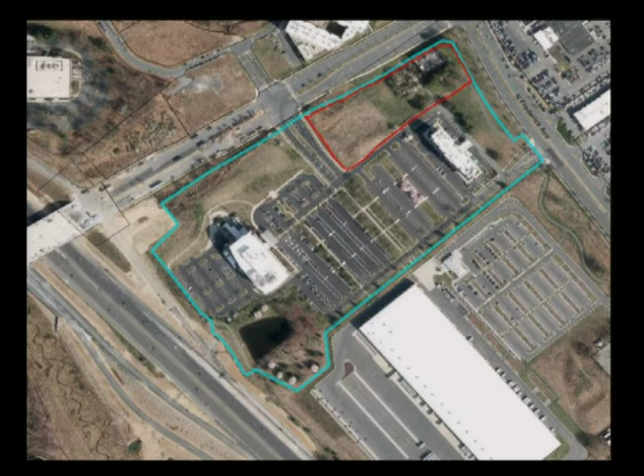Good evening, all, let's jump in. Good evening, Commissioners. Staff is before you to present final site plan application SP-9199-2022. This application was based on the concept preliminary site plan SP-07008, which was approved on October 20th, 2010, and approved the overall proposal for the Monument Office Park. This application represents the third of a four-phase project, the fourth phase being the second Kaiser Permanente office building shown on the concept plan. As shown on the screen, the office building is located at 735 Watkins Mill Road. The property is accessible from Watkins Mill Road and Maryland Route 355, North Frederick Avenue. This application comes before Planning Commission in accordance with Section 24-168, which requires the Planning Commission to grant final site plan approval.

The applicant is requesting approval to construct a 142,600 square foot, four-story life sciences office building. The applicant is also requesting approval for amendment to Final Forest Conservation Plan ENV-9201-2022, pursuant to Chapter 22 of the City Code.

Here to start the presentation on behalf of the applicant is their attorney, Mr. Jody Klein. Chris, I have to tell you, I'm going to apologize. My script, I was introduced to staff, and I didn't - I just sort of flipped right through that. I apologize. Thanks for being here, and thanks for introducing the application.

Good evening, Mr. Klein. Good evening. Thank you. For the record, my name is Jody Klein. I'm an attorney with the law firm of Miller, Miller & Canby with offices at 200B Monroe Street. And I cannot tell you how happy I am to be in a hearing with live people face to face instead of having to talk to you over a computer screen. Just so much better, I think, better dialogue going on between us when we do that.

My role is kind of limited, the attorney Jody always has. You can see us when we roll our eyes. Yeah, right, yeah, the body English is much more obvious when you sit. No hiding that now. Yeah, that's exactly right. No, I sure - but nobody really wants to hear from the attorney on this stuff because you want to get into the building. That's what really kind of is important, how it sits on the land.

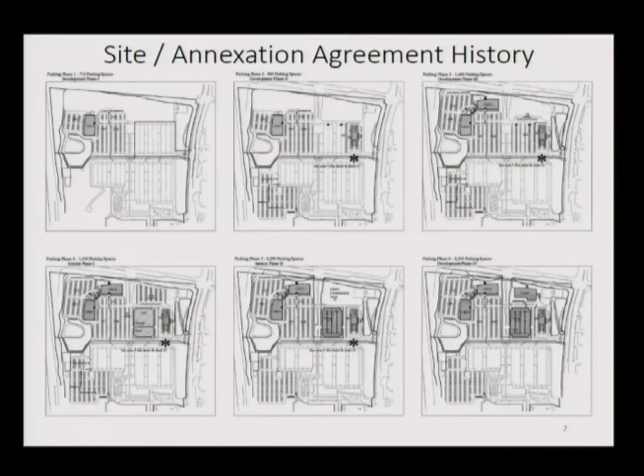Of relevance there is that when OB2, Kaiser Permanente 2, and OB3 Monument both get built, there would have been enough demand for parking that we would have had to build a parking structure. So that shows you the envisioned sequence or evolution of the project.

Could I have the next exhibit, please?

This is also one of the exhibits generated to show you what's going on, and it basically shows what's in the field today with the Kaiser Permanente building and the hotel there, and our project in the upper right-hand corner, which you'll hear a lot more about in a minute or two.

The next exhibit, the only difference from the previous one, is the footprint of the building that was actually approved for that property, so you know what was originally approved and can contrast that with what you're going to see today.

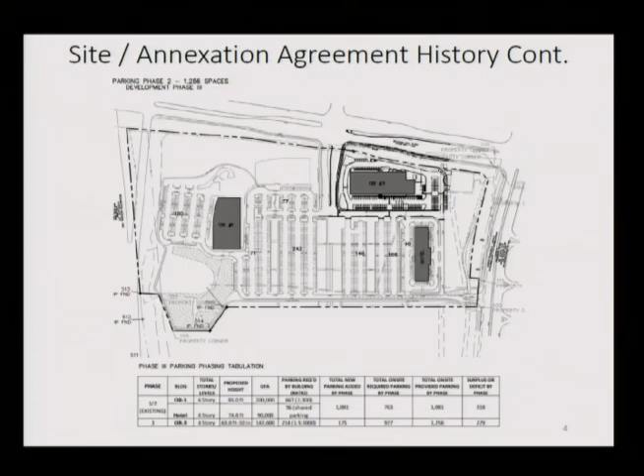That was a 260,000 square foot office building, 8 floors, about 110 feet tall, 867 parking spaces, to be located 48 feet from Watkins Mill Road after dedication was ultimately going to occur.

The third exhibit basically shows what would happen when OB2, the Kaiser Permanente building, gets built. The reason the staff wanted us to stress this is that they've insisted throughout the review process that we always demonstrate enough parking to satisfy our building, and that there's always enough available to satisfy any other users to build in the community, in particular Kaiser Permanente.

This matters because it's a condominium regime, and each condominium unit is the footprint of the building. So there's some parking associated with each building, but most of the parking is in common element areas — basically a pool of available parking.

Kaiser Permanente obviously doesn't want, and your staff didn't want us to encroach at all on whatever parking they need. They have a pre-approval for 200,000 square feet and need 667 parking spaces.

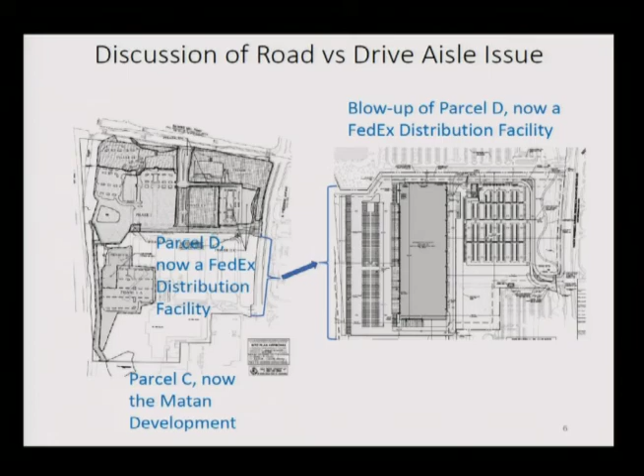It is true that when you approved the final site plan for FedEx, you did reserve a connection into the Monument Office Park, but it's undefined where that's going to be. Based on how their parking is laid out with hard curbs and drive lanes, it's not going to be an easy connection. I believe that was further compounded when the Matan plans came in—there's a connection between FedEx and Matan, but it's off to the side in a very unusual location. So the point is, there's no main thoroughfare from south to north. These two things don't really work together that well.

If you had a chance to look at the staff report, we had an agreement with staff that probably the evolution of development out here does not allow you to consummate the original planning principle, if there was one, to have a street running through all the communities. So that comes up only in the context of whether we can park cars at 90-degree angles, which will come up in our presentation.

With those two historical items and overview, I'm glad to answer any questions, but I think you'd like to hear from Dana Clark, who's going to tell you how the building is located and oriented, and then Jeff's going to tell you how it's going to look. Do you have any questions of me? No? Okay, thank you very much.

Not for now, Dave. Dana? Do you want to do that from here, down there, or wherever you want? Wherever you'd like to do it. All right, but take your minute.

Thank you. Good evening, I'm Dana Clark with Clark Azar & Associates, the civil engineer on the project. Pursuant to Jody's description of the history of the project, this is an overview of the overall site and where our project sits, in the upper right quadrant, OB3. OB2 is not built yet, but the hotel and the Kaiser building are.

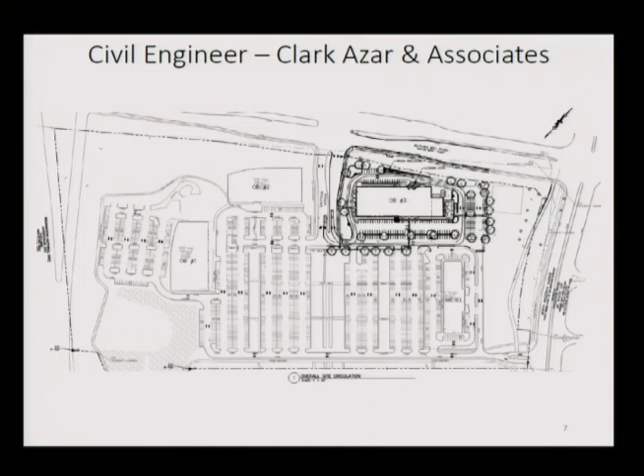So this is our colored-up blow-up of our site. After entering off Spectrum Avenue, we have two access points directly off of Spectrum and then farther to the east. We've provided 175 parking spaces on our site, taking the remainder of our 214 required from the bulk overview parking spaces for the development. We provided site circulation for WB50 trucks and any other possible delivery vehicles, as well as fire trucks, all the way around the site.

We've also provided fairly extensive access paths for pedestrians around the development, as we're removing one sidewalk that currently exists on the north side of our drive aisle. So we're providing another sidewalk on the hotel side of our main drive, the street Jody was previously referring to, as well as a connection around our site from the hotel, near the substation, and then access directly to Spectrum.

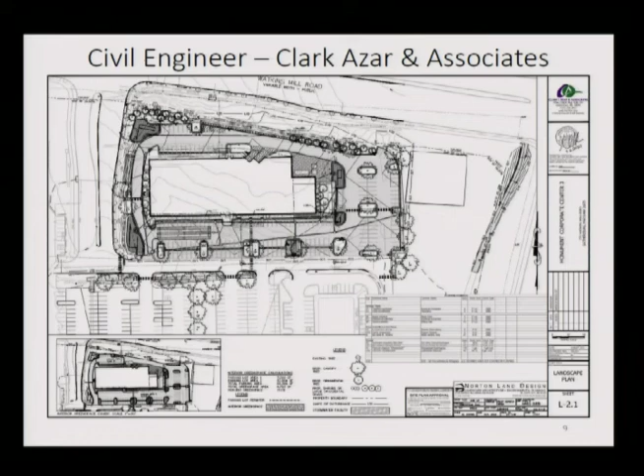This is just a closer view of the landscaping plan and how those requirements are being met, and the breakdown of all the trees, shrubs, screening, etc. I think Jeff is going to go into the building unless there are any questions on the site.

Let me ask you, if you put up the plan that showed the extension of the asphalt path on the linear park, just for quick illustrative purposes, give me a before and after on how cars got and will get to the hotel, and how pedestrians using the linear park trail would get to this building.

Cars currently get to the hotel via the access on Spectrum Drive, similarly to everyone else, so we're not impacting that. Right now it's a drive aisle that feels like a road, or at least a kind of reserved drive aisle that gets them to the hotel. It's not going through a parking lot, it's a trail, not a road. It's an asphalt paved trail, but it's not intended for vehicular access.

No, I'm talking about the vehicular path in for the hotel. Yes, you're in a car, right? You drive in Spectrum, turn left, and the drive aisle that takes you to the hotel is a dedicated, at least it feels like it now, kind of dedicated drive aisle. Moving forward, it will appear to cut through the parking field for the new building, right?

Yes, because you've somewhat got parking heading in off of it. There's no continuous aisle or anything like that, it sort of becomes a parking lot. Correct. All right, so that condition, the hotel folks are all aware of that, they understand the wayfinding, all of that's been discussed, right?

Can I add a little context? I'm Ryan Kim, I'm with Monument Realty, the development manager on this project. So the hotel actually has its front door on North Frederick Avenue, and there's a North Frederick Avenue address. There actually is an access point directly off of North Frederick Avenue. So I would imagine that most people putting that into their GPS are being pulled onto 355 and entering that way.

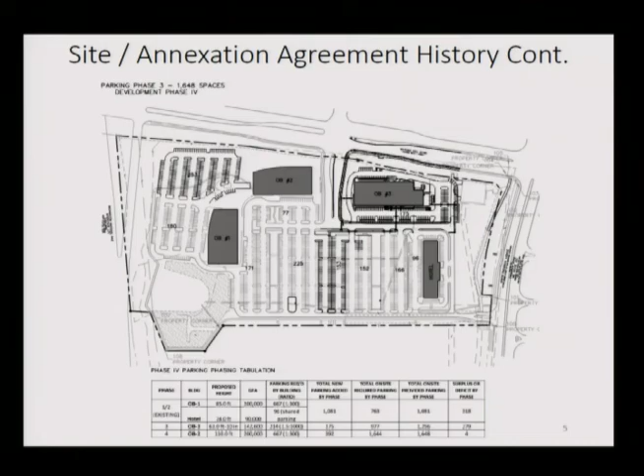So we like the way it's set up. We like the location at the north end of Gaithersburg because it means people can get in and out with a lot less traffic than at the lower two exits. So we think it's going to be attractive to tenants from that perspective.

Talking just briefly about the site plan itself. There's a lot of green to the north of this project, but the majority of that is right of way, so we do not control it. There is, as mentioned before, the old IBM substation to our east. The building is sitting on the site, which is a relatively densely developed suburban site.

The things that are unique to a life science building that are important to tenants looking at the building: obviously they want a good front door, a good front door image, that's important to them. Good loading docks and good loading is important. They have large trucks, and it's not just once or twice for move-in, it is continuous. They have stuff coming in on tractor trailers, on pallet trucks. So loading is a very important aspect.

Also, a lot of the major tenants will have other, quote, junk - it could be transformers, storage tanks, nitrogen tanks. There's a lot of stuff that life science tenants need to have. We've tried to create a service yard to the northeast corner of our building to accommodate a lot of that. Our base building generator and transformers are in that service yard, and it's our intention that the remaining space be kept available for tenant equipment that might come in. We have no idea what it is - we're just guessing that it's going to happen because it tends to happen on almost all projects.

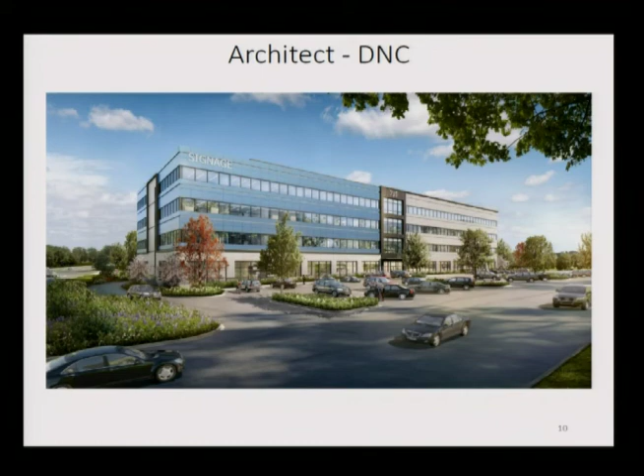As a spec lab building, some aspects of it look like a good spec office building. There are certain differences - from a good office building standpoint, we work with long span structure, so we basically have 40 feet from the skin of the building to the interior columns, making it very flexible for what happens on the inside. The cross bay spacing is 22 feet on center, which is different than an office building, because that works in a lab harmonic.

This building, when we get to the typical floor, you'll see it's a 3-stair building, so we can end up having quarter floor tenants without having to run a corridor back and forth. As I said, we gave priority to bringing the loading directly into the building - the intention was to marry the loading up against the rear service entrance rather than letting it come in on the east end, because we did not want to break it into a predefined small tenant suite over there. So the loading area is married up tight to the building, with direct access into a service elevator that allows equipment to get up onto the floors.

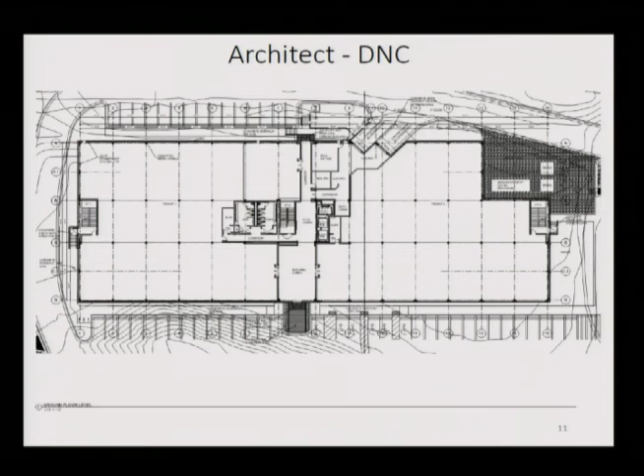When you look at the typical floor, it's a 3-stair building with a small central core and a lot of empty space. As a general rule, the actual population of this building is probably going to be about half of what it would be as an office environment, but it's designed to meet office live loads and egress capacity. The building is set up day one with DOAS, dedicated outside air systems that supply air into the space, giving us a flexible way of getting the conditioned air down into the tenant.

One of the things different in most life sciences buildings from a typical office is the tenants tend to pay for all of their own utilities. So what we try to end up with is a situation where we can meter almost everything that the tenant uses. We have VRF systems that control the individual spaces within the tenant areas, and exhaust fans coming out directly metered to the tenant space as well. The DOAS does get allocated between the tenants.

We have 4 DOAS units on the roof of the building, fed down through shafts that go in day one. We've also planned for and structurally set up to accommodate a large number of larger shafts to get exhaust up and out of the building. We don't exactly know the size of those yet. Those will be planned for and worked into the tenant improvements as they go forward.

Another important end of the building, the service end, is the roof. To begin with, we'll have a small penthouse because we wanted to allow people doing work on the roof to have a staircase to go up, rather than having to go up a ship's ladder or something like that.

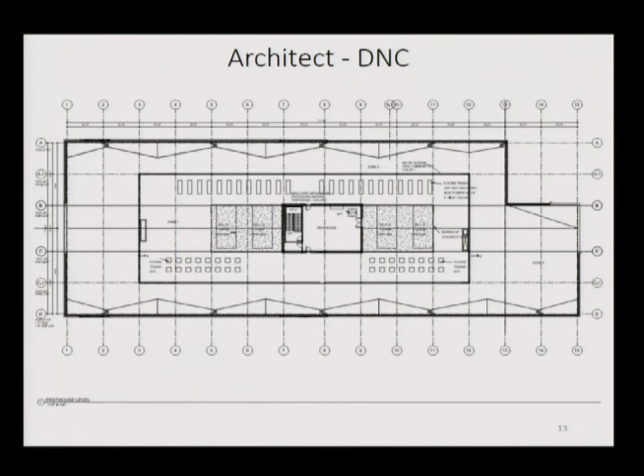At either end of the building are spaces where the piping that comes up to the roof will penetrate through essentially a doghouse, so the penetrations come out on a horizontal side rather than a vertical side, to minimize risk. We've tried to work in the tricks we know will be required to allow this building to morph over the next 20 to 30 years of its useful life, because these are heavy working buildings. The equipment that goes into them, not just the benches and casework, but also the systems to support it, the fit-up costs here are extensive.

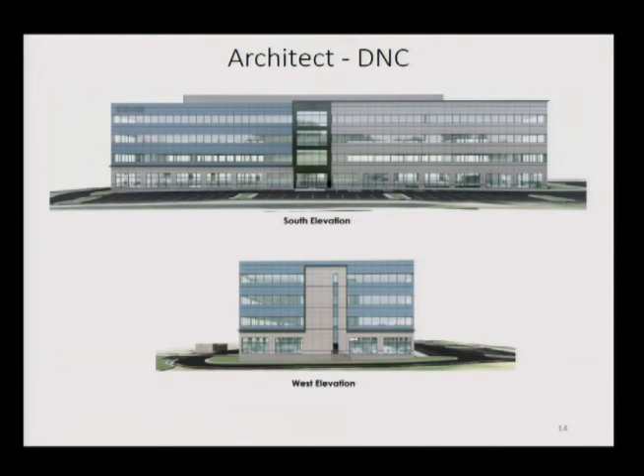I don't know if you want to talk about the elevations, but if you do, I can — most people just tend to look at it and say, okay, that's an elevation. That really takes you to the end of the presentation. If I've missed anything, or if you have questions, I'd be glad to talk to you about them and try to give you the best responses.

There's some fundamentals I'd like you to cover. It's a little bit about site planning, a little bit about architecture, but there's something about the site and this building that don't quite jive yet, and I want to understand some of the decisions that went into how you sited the building. Let me give you the big ideas, and you can tell me how they figure into what you guys decided.

The first is — and these guys have written into it — if you imagine a user, tenant, or employee of these businesses wanting to take advantage of a mixed-use environment, they want to leave the building and be pointed directly at what those amenities are, with a safe, reasonable, and interesting path to get there. So the front door and arrival is something that happens kind of when you get off the street, not necessarily when you find the front door.

Right now, its backside is facing the main road, and its second backside is facing the other main road. And the front door is way around the side, way around the back from where they would likely be if they want to go out to lunch, do something after work, or head over to Spectrum.

The loading dock facing Watkins Mill seems a little counterintuitive, but I also know there's some site constraints that would have driven that calculation. So just kind of take it apart. If you were a pedestrian or user and you wanted the best possible way to come and go from the building, in my mind it would be off on the north, northeast, northwest side. I may have the north arrow wrong, but it would be facing Watkins Mill or that direction. And if you were doing a loading dock, I wouldn't think it would be on the same side. But take us through that.

Point 2 is what we've all been talking about and harping on more than anything: there are some very clear intentional things on this concept plan regarding pedestrian connectivity, having a 2-sided building, 2 similar if not equally weighted entrances, and connections from the path along 355 that are really non-existent in the plan before us for review. I think we've got to figure out a way to address those. Recognizing grading is an issue, but right now the architecture of the building actually supports 2 entrances. If you look at the elevation, they're basically the same, with the difference that the north elevation has stairs and the south elevation doesn't. So it feels like a site planning issue that could be addressed. But even if you respected that and capitalized on the fact there's a big center entrance on the north side of the building, the walkway could still wander its way west and pick up Spectrum. At least it would be on the side intuitive to where you're headed, as opposed to coming out and trying to snake all the way around the building.

Point 3, the only one, is what John made about the loading, and that was my initial reaction too. From a site planning perspective, that's not the best place to put the loading. On the other hand, looking at the elevation, those seem to be depressed docks, not fully at grade. I think those could be handled, be it landscaping, screening, or other things, and not compromise the function of the building. It's not ideal, but it's certainly not a deal breaker. So coming back to the point, I think this is a lot less about building architecture concerns than it is site planning, screening, and pedestrian circulation.

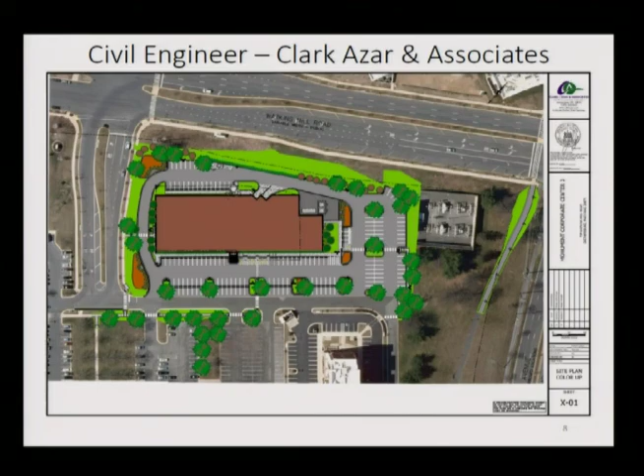Go back and look at the approved concept plan. It goes dead into that corner at the intersection — that's your point of connection with one end of that arc. So you're going to come around the south side of that little stormwater pond there. Yep, correct. And again, that can all be nice. You work your way up to the corner, and it's great.

Go put some stamped asphalt or whatever, make it cross that road, and whatever it needs — it wants to be nice. Yeah, nice — you wrote down nice. And benches, lots of benches.

Lots of benches, yeah. So I would just say applicant to revise the south sidewalk with staff prior to issuance of any permits. Well, you can look at the whole pedestrian system — too many ifs and thens — but you know where we're headed. We don't want arbitrary sidewalks, we want it all interconnected, and if we can't do ADA another way, we've got to do that.

So we could do one condition if you want, just say applicant to work with staff to re-look at the entire sidewalk connectivity related to this project. I'm comfortable with that, given the record, and that you guys have seen that and nodded yes, understanding those different components. I think that would be fine.

You're a genuine scholar. Well— but if you feel better about spelling out— He has to. Well, no, I mean, I'll leave it to you guys. Do you feel better spelling it out? I think we've been pretty specific about what we want. Okay, yeah, I think the record speaks for itself. Okay. I mean, you're good? You think you got it? Yeah, all right.

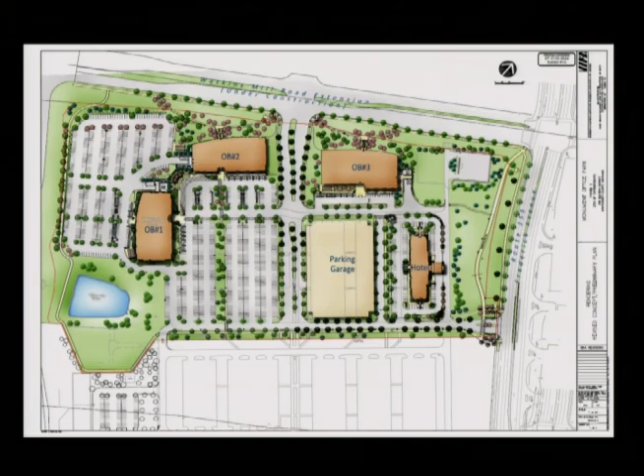Given your new population, which is different than the medical and the hotel, which are transient, these folks live here basically most of their week, if not weekend, some of them. But you're kind of constrained along Watkins Mill, so 355 is your opportunity to create some nice amenities.

My guess is they won't feel like they own any of that or feel at home until the substation goes away, because I think that's creating a big barrier right now to associating with the linear park, unless you walk the path that we're trying to get. But there's 400 feet past the substation that's unplanted right now. It's a nicely screened substation, it's not bad.

Did you screen it 30 years ago? We did, look at that, same materials as the building, just like you asked. What I'm saying is whenever that substation goes away, it would be great to see a comprehensive landscape plan from curb to curb in that area.

Frankly, I just think as a business you're going to attract some great users here for phase 2. Obviously phase 1's going to be absorbed in a heartbeat. And I think that book of urban planning stuff has some nice fountains and other things in it too, on page 30. Koi pond, maybe? Isn't it a location for a new food truck?

All right, so how many conditions do we have? Now you've got his attention. Greg, recap for us please, what would we have for conditions now?

So I think we have 8 conditions total now, 2 new conditions added tonight: one related to the connectivity and the sidewalks for the entire site related to the project, and the other related to the enclosures being integrated into the building architecture.